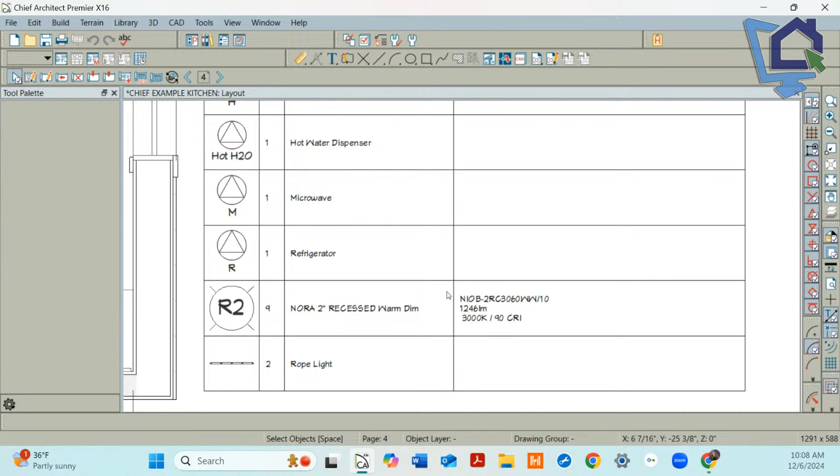So what I have on my screen are just some things I really believe you need to do regularly, and that's making sure you're saving things to your library properly. I'm really meticulous about my lighting, very, very picky about my lighting and what products I'm using. So I've actually saved recessed can information into my library, and in those objects I saved all of the information, so I know exactly what model number to use when it comes in.

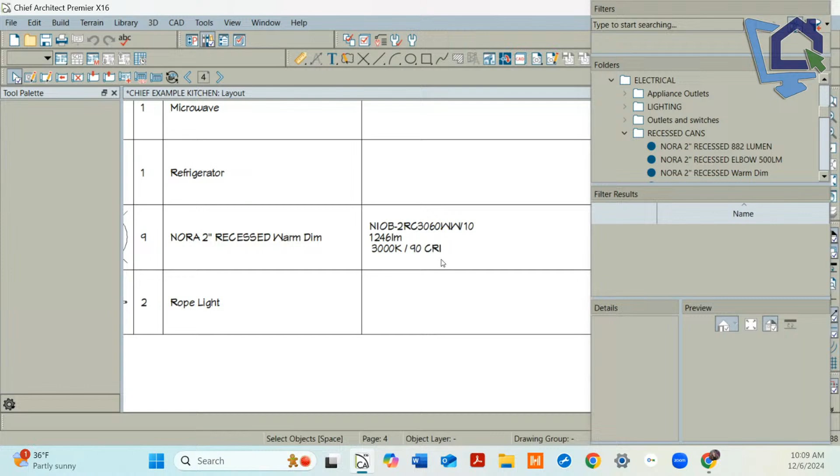For that fixture? Where are you saving that? I saved it in here, right in my library. So when I open up my library, I added this object, I created this object, I saved it, and I put all the information in the object information panel right here.

And I do have custom fields that I added. I want to know what kind of trim I need, what kind of lighting, so I created my custom field right here called trim. This is the coolest thing - I create these custom fields, and in here I'll have fields like amperage, which we need to put on our electrical plan for our appliances. The electrician needs that information, so I can immediately add it right into my field. All I have to do is just type it in.

I'm gonna put a pause to you real quick. Sure.

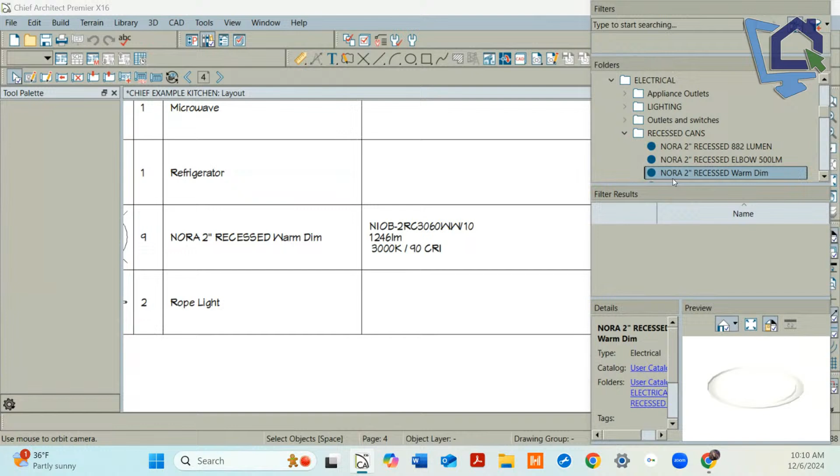Now you have amperage, but you didn't format it as a number, which is a new thing in X16. Let me open this up. See, this is where we should all be doing this as soon as Renee says this. So under amperage, by the way, you could do it in lowercase and then format it so that it's uppercase, so that you have the option to do either or.

The reason why I put it in caps is because that way I can find it in the catalog. That's why I put it in the schedule, and I can explain that. But in the field name, you could actually have had that format as a number. And so now when that reports to a schedule, that can be tallied as a row total, so that you could tally up all the amperage for all of your various fixtures if you wanted to.

I don't know that we need that. I could actually put the lumen output -- well, it's not even lumen output, it's the wattage in here. I could actually have a wattage thing, but nobody's asking me for that kind of information.

So go ahead and put a field value in there real quick for that fixture. I'm going to totally derail you. Okay, we're going off the rails, this is not planned. You're just going to put 20. That's it, just put 20 in there. Well, if you put 20 amp, the field value will actually come up with an exclamation mark saying that hey, this is not a number.

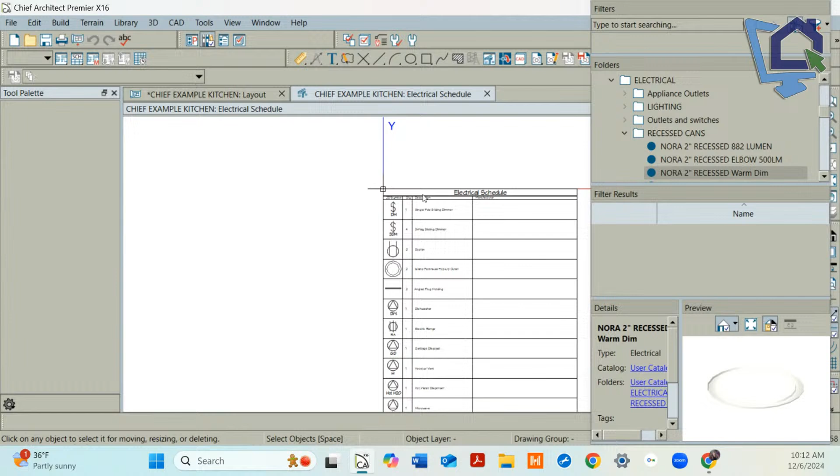Got it, okay, and then there you go. Go ahead and press OK. Now I don't have that in the schedule, so I can open the schedule and add it. Place that fixture in the plan. Oh got it, right there.

Hold on, if I can grab it and move my schedule. I'm not in plan view though. There you go, it was this one, just put it in the plan. Okay, it's there. Now here's the next thing I would have you do.

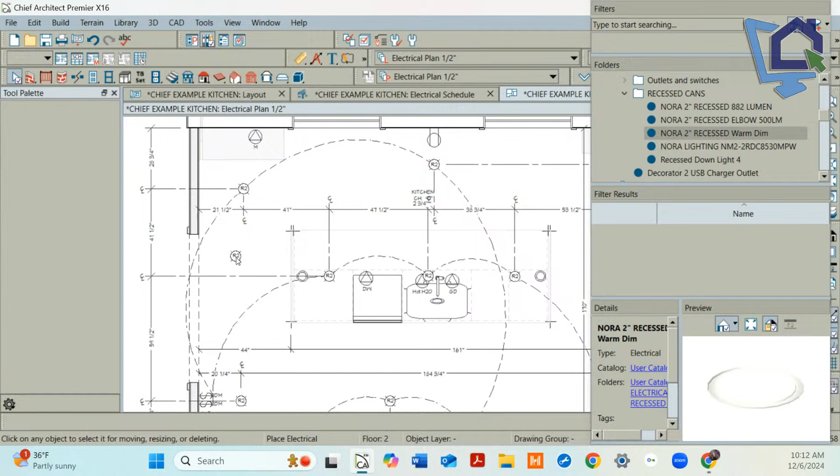This is a good one. Go ahead and get into preferences. Are you all following the bouncing ball? Totally, yeah, this is the thing -- following the bouncing ball. Get into the unit conversions panel.

Unit conversions, and you're going to add a new unit and call it amp. And this one I would definitely do sentence case -- definitely, so AMP, capital A and B... yeah, capital A. Okay, now it doesn't matter what measurement type it is in this case, because you're just using it as a reporting value. So go ahead and just press OK. So we've now created a new unit that is an amp, and press OK again and get out of preferences.

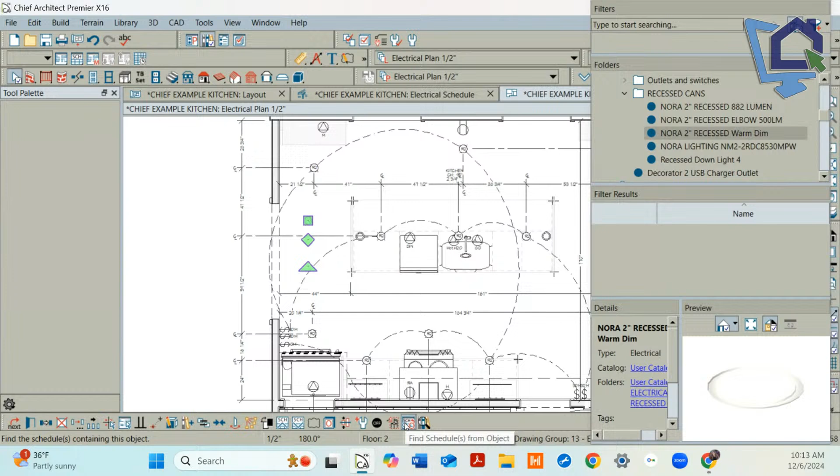Now go check your schedule out. You could click on -- here's a new trick in X16, by the way. Would you go back to plan for a second? Click on that fixture that you just placed. In your edit toolbar, the second to the last icon there, find schedule from object. That is so cool, I love that.

Now open your schedule and add that custom field. This is why I have it big, so you can actually find it in caps. Explain how you just did that part. We're in columns and rows. Oh, so I went to columns and rows. Anything that I add, I put in all caps.

Everything that's upper and lowercase is what the program has, and it's going to pull information from the materials schedule, so I can't find it. So I capitalize everything that I need, and then all I did was add it. And then I just hit OK, right? And now you hit OK, but let's actually go back into it.

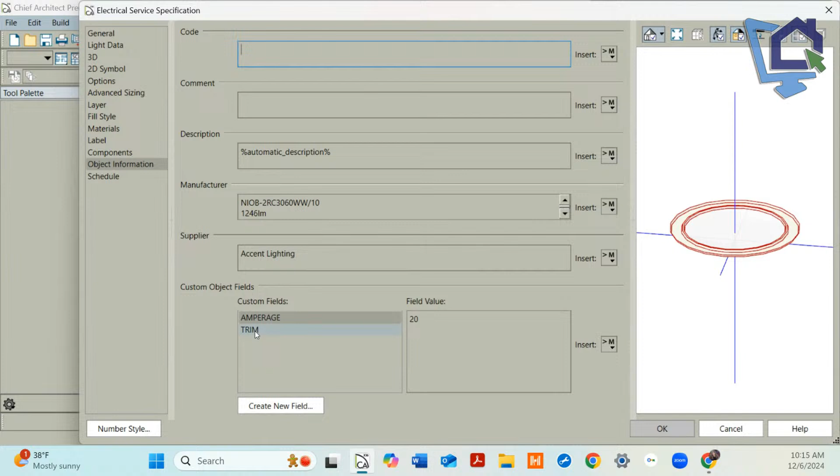Okay, go back into the catalog again. I don't think I had -- and then select amp, and now see, this was the wrong one. This is the one that was not formatted as a number because it's not giving you a calculated total on the right hand side there. So you added one that was amp that wasn't a number format. Oh, because I didn't do it right when I added that information in here, because I had this amperage and it's not, and there's no way to go back on that.

Number. You can press cancel. I think you can, it's tough to get it from the catalog though. You have to get it up here -- default settings, schedules. Got it. Custom -- custom object fields. Yeah, and then amps.

Yeah, go ahead and double click that or edit it, then format it as a number. There we go, got it.

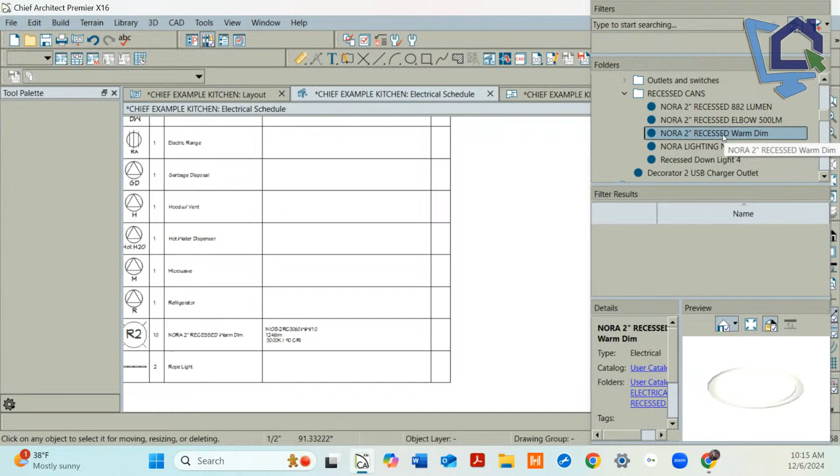But I don't know that I actually put that one in here because it's not showing up. That's okay, I don't think I put it. Just open it up real quick. Okay, click on AMP again. There we go.

So now we have that option over on the right-hand side to calculate total or sum similar rows. Here's the next cool part of this: on the left-hand side, we have a number formatting panel.

So in your panels, yep, and then go ahead and click on AMP and you get to specify the unit. What unit are we going to specify it as? You can actually pull anything down out of here, but you would pull amps.

AMP, which we just created. And then you're going to change decimal places, switch to decimal places and just set it to 0 probably. Got it, so there you go.

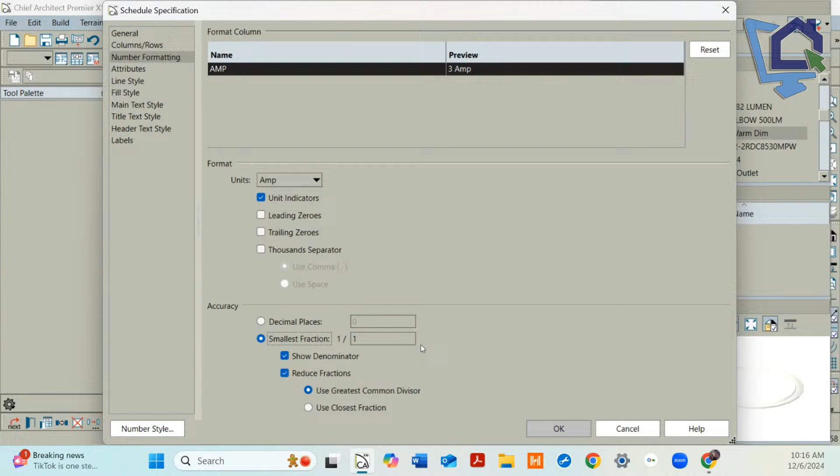Now you have something that's reporting amps and it will tally a total. That's pretty cool, that's pretty cool.

If you have to do that, am I derailing you? No, it works, no, you know what? I love that, actually just the fact of going back here to do the edit just totally makes sense, because sometimes I end up making more special things than I want, and then I forget to go back here to get rid of them, right?

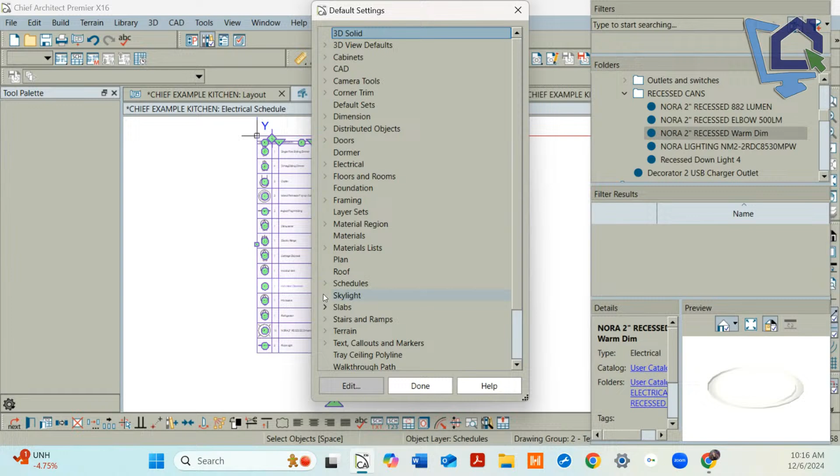So you can come back in here into your schedules and get rid of them, and that's really nice. Hit done real quick and go into your schedule again. Okay, one of the greatest things about schedules, go ahead and get into columns, rows.

Let's click on any item in the columns to include, so on the right-hand side, anything on the right-hand side, one of the ones you already have. Okay, yeah, we have our ability to rename whatever this is.

Yes, so when I do custom fields, I have it that it's just number input 1 would be my amperage. And then in the schedule, I rename number input 1 so that I'm not building out a ton of custom fields across all my objects. So that way, number input 1 could be amperage for an electrical legend, but input 1 could be...

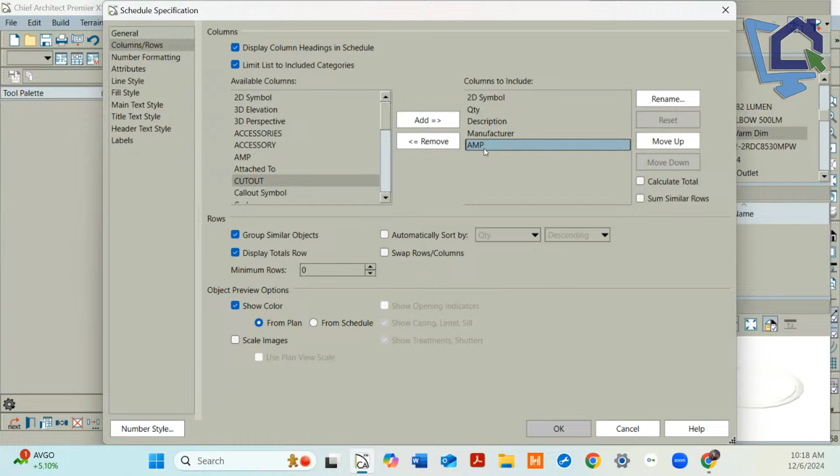...net free area in a foundation vent schedule. It means I don't need to add all those custom fields. I'm just using one custom field and then renaming it in the schedule, if that makes sense. And I can go over that later. Oh, that's pretty cool, that's pretty cool.

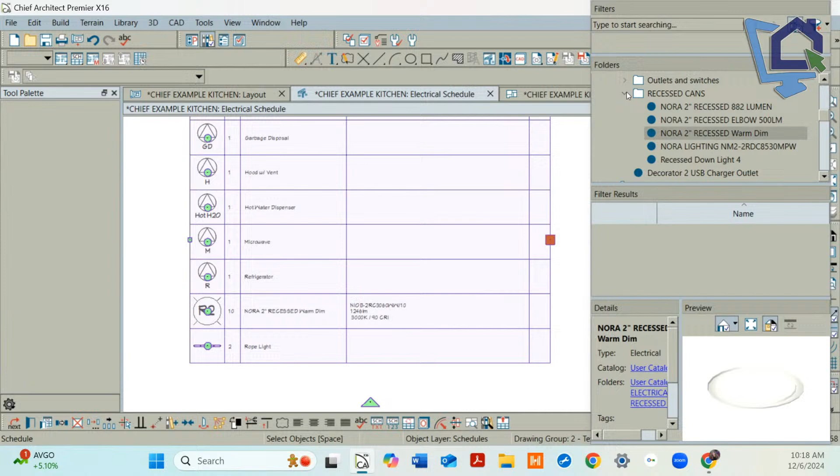So exactly, there's so much opportunity in the program, which I just think is fabulous, right? That's the thing, the goal I want to share with people is that you can make your life easier. So in lighting, if I have something special that I use all the time, or an electrical thing I use all the time, I have this already set up and saved in my library.

So in my library - and I have Renee's library in here too, so it can be crazy - but in my user catalog, I actually have my schedules saved, and they're already set up.

Okay, yes we can, Alan, yes we can, good question. Oh see, that's great, okay, go to sleep. Sorry you guys, I really apologize. My grandson comes here one day a week, and it's during this, so I absolutely apologize, you guys.

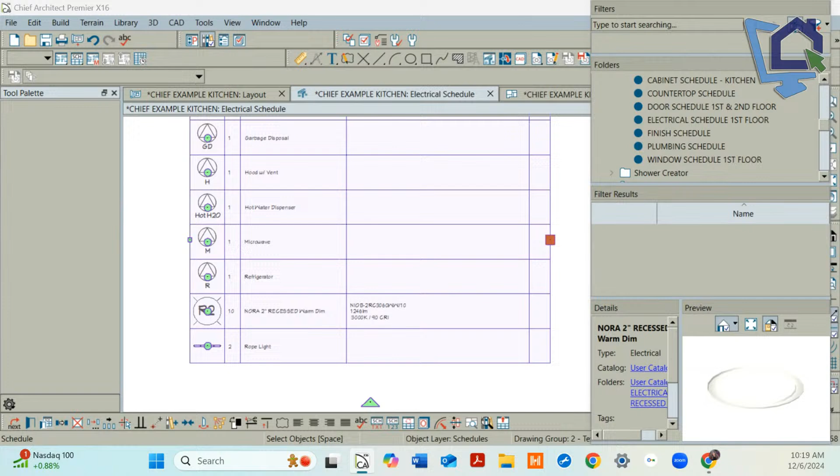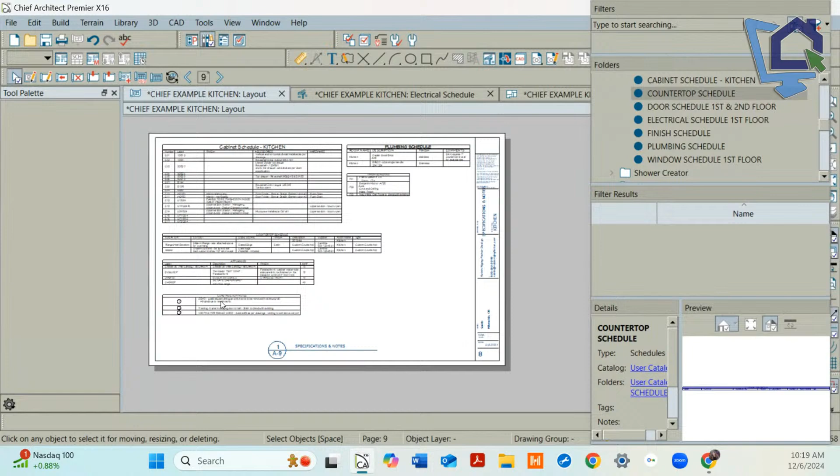Anyway, so here's the new ones that I really enjoy creating schedules, and this was one that I learned a while ago and just thought this is fabulous - creating a custom countertop schedule. So designers are constantly doing crazy things with the kitchen. So I was playing around with this design, I just kind of messed with it, and I created a custom countertop schedule, which I started using a lot more now.

And what I have in here - now this is what I found you have to do - is in this plan, I have my range wall elevation has one countertop, one kind of material on it.

And my island has another countertop on it. What you have to do is save the countertop as a custom countertop. Once you save it as a custom countertop, then you can start adding all the information that you need for your contractor or installer. They're going to ask you what kind of finish, what kind of edge detail, how you want the details done, and you can put all that information in here to create your own custom countertop schedule.

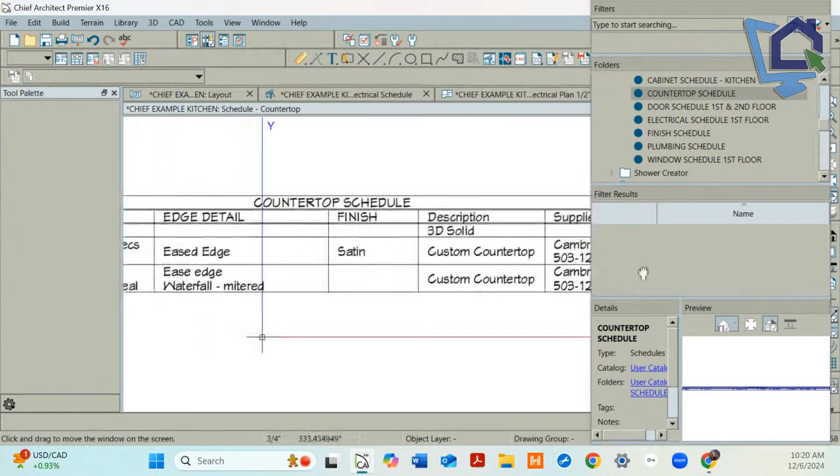How do you make a custom countertop? Yeah, this is easy, this is really fun. I am so in love with this program, it has changed my life. I was an AutoCAD person for years, and AutoCAD is a great program, but oh my gosh, my specs were crazy. So this countertop is a custom countertop.

What I did was select it - right now it's a custom countertop, one countertop. To show you how, I'm going to go over here because this was easier. I'm going to delete the custom countertop off of this plan. So I'm just going to delete this and get rid of it. It did not remove - oh, on this side it did. Nope, that's the custom countertop. I actually selected the wrong thing.

Hang on a second, guys. Get rid of the countertop. Well, I deleted the cabinets. So I'm deleting the custom countertop right now. So these are now standard cabinets with their own countertop attached.

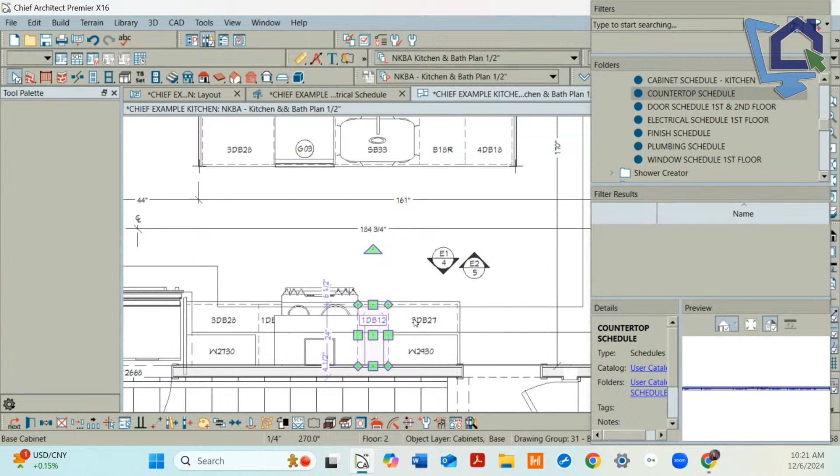To create a custom countertop, you just select - hold your shift key down and select all of the countertop, all the cabinets. Then at the bottom of your screen you have an icon, I don't have my zoom thing on here so I can't show it to you guys, but at the bottom of your screen is an icon that has a red top on it, and that is the custom countertop tool.

Once you select it, you actually create - I think you already did it. I already did it, yeah, let me undo that so it's back again. Let me make sure we have it back. Okay, one more time, there we go. So once you select all your countertops and cabinets, then you push the red button. I am just messing up, you guys. No, go forward twice. Go forward, I don't know where I am now if I did too many. Oh there - no, you gotta go one more time forward, one more time forward, there we go.

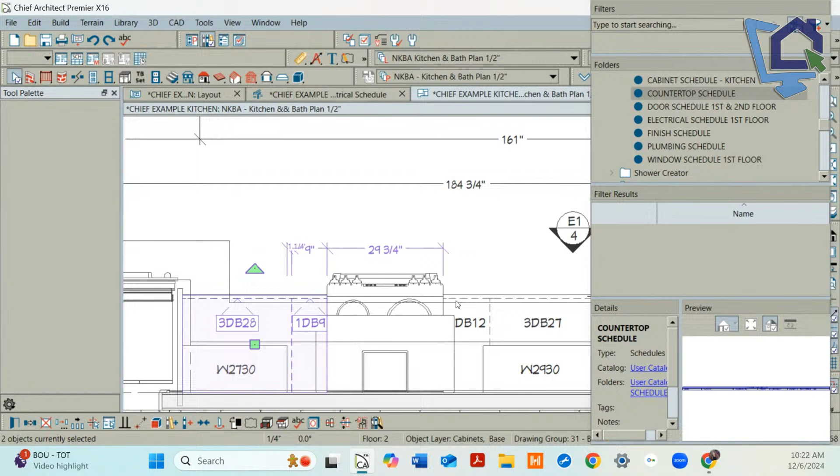Yeah, it's still showing a countertop there, I still don't have it. Let me see, just open a new plan, you goofball. I'm so silly. What she's trying to say, as she gets herself back together again, is that a custom countertop replaces the automatic countertop that exists on the base cabinets.

Once you do that, you can manipulate it in any way that you want, including being able to set specific values for that particular countertop, which you can't do without changing the default on the cabinets themselves, or you've got to do it at a cabinet level. This gives you a very easy way of doing it.

So we're here right now - this little button on the bottom says generate custom countertop. You select it, and once you have a custom countertop, you select it and now you have a field that allows you to have your object information. So now you can start filling out information in here and say all the things you want with it. Now that I've deleted it a million times, I think I've lost most of my information.

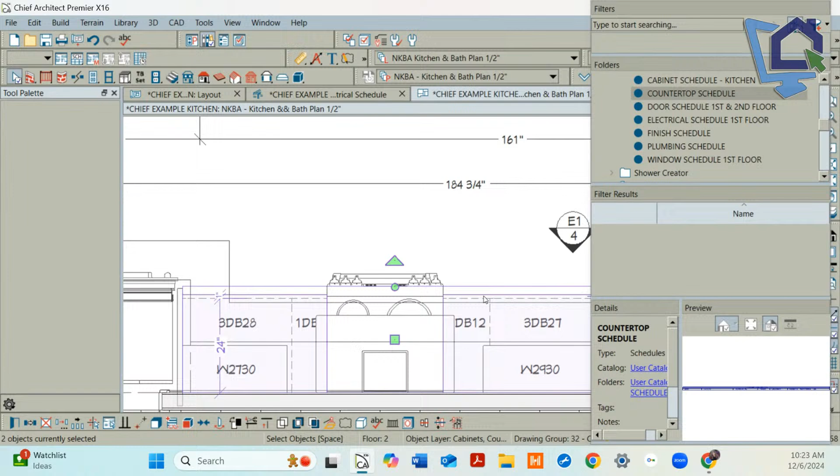So whatever, now you can go into it and open up the countertop and you have your object information where you can actually say where it is. So I have my location - I can type that this is my range wall, and I can add that my cutout is for a slide-in range. And I can write something like specs for overhang.

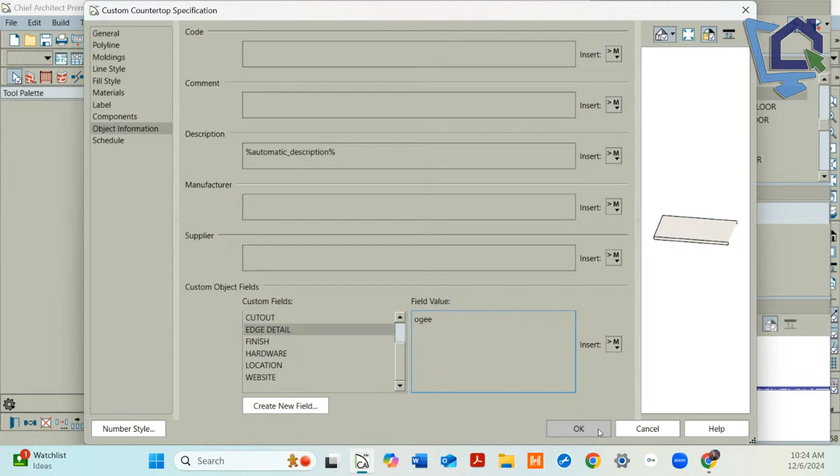I can add information here. I can say that the edge detail is going to be an ogee edge, right? I can add all this information and then it's going to immediately report to my schedule. Well, if I pull a schedule here. You include those rows like you did earlier? Yeah, and I do have that, as long as you have them added into your schedule.

So let me just pull the schedule up, and I probably have too many schedules open now. But if I go to my countertop schedule, let me just pull it up here. And you can see that you can just immediately start adding that information in there. So I have all of that information. What I don't have in here, I have not added location. So I'm going to remove that.

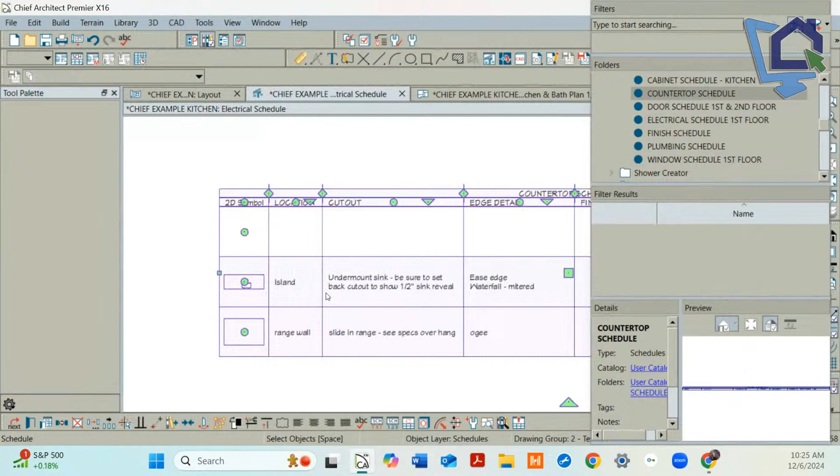Have you ever added the 2D symbol? You can do that. You can easily add the 2D symbol. It's going to look like a rectangle, unless it's a corner or a shaped island or something like that. So you can add that information. It shows the sink cutout. Yeah.

That's nice. Yeah. So in this one, it's not going to be great because it's actually two separate sections. So I don't find the need for that, because if I'm doing a very odd countertop detail where I want to be able to show more information, then I'll do a countertop plan. So in this plan, I didn't do that, right?

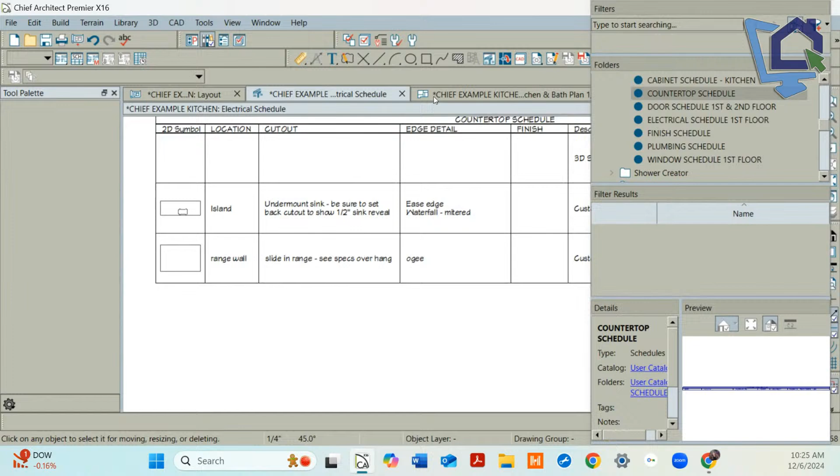But could you open the schedule up one more time? What's that? Open the schedule up one more time. Yeah. Go ahead. Could you open up the actual schedule real quick? Open up a brand new schedule? No, open that schedule. Open it. Oh, sure.

See how under object preview options, scale images is unchecked at the very bottom there in the last section? Right here. Yeah. So you can use plan view scale. Go ahead and check that. And this will actually scale those countertops according to the size of them. And then you could shrink this preview down by changing your row width. Just change this. Yeah.

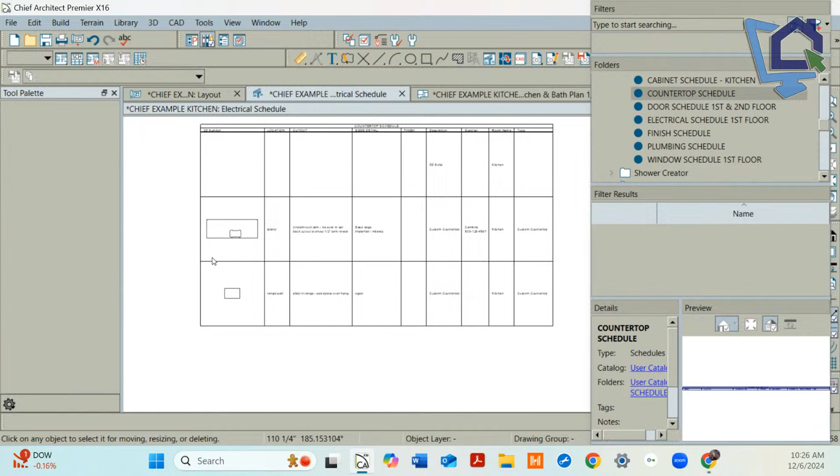Well, that should have done it. Not doing it. Oh, interesting. Yeah, if you open it up again and uncheck plan view scale, that might be it. Yeah, just take that off. Yep. And now you should be able to shrink that row. Now you can shrink it down. But here it is. I probably would not do that, Renee.

Well, I don't even have it here because I wasn't playing with this plan to be able to make it do that. Hold on a second, let me turn my library off. I would actually do a countertop plan like this, and then I would put dimensions on it.

So in this plan, I actually create custom countertop schedules, or a custom countertop plan if I'm doing something that's really crazy. This one is not set up. I didn't do anything with it because I didn't create this plan for this project, but I could add any extra information that I needed just by creating a custom countertop plan view, right?

And I do that a lot, especially when I had a project where there were a lot of notes that the countertop people had to have. So I actually created a custom countertop plan, which was really fabulous. And that's one of the things that I really enjoy, making the changes with this program.

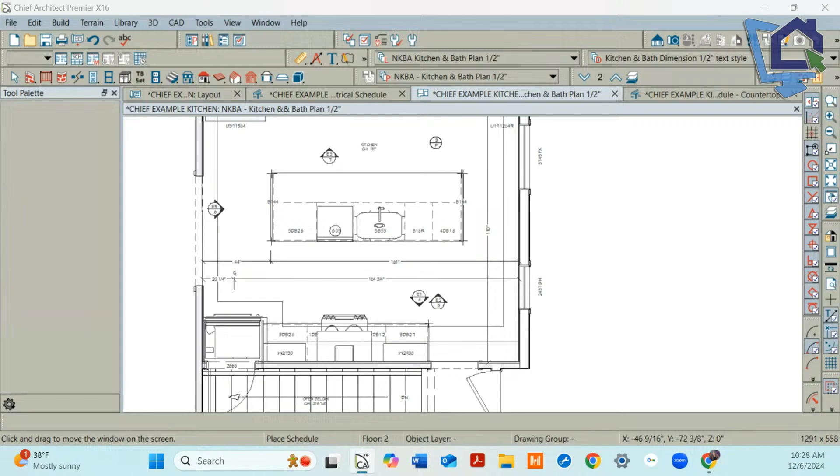So the other schedule that I just recently did, I was working with a designer who, this is crazy, I've never done this, but she was buying art for a client, the client was moving, and they were hiring a hanger, somebody to come in and hang all the art. So she wanted to be able to create a plan for the installer to know what piece of art went in which room and where it went.

So what she did was she did a material region on every wall. She opened it up and she added the location. She added the size of the art and the name of the art and had it by room. And then the installer knew which wall to put it on because she would say it's on the west wall, the east wall, the north wall.

And we created an entire art schedule, which I never even, I mean, she was like, how do I do this? It's like, okay, let's figure it out. That was a good one. It was great, right? Something that I would never do. Another designer said, well, what about furniture? Which is crazy, but you could then say, oh, the green sofa that's 6 feet long, right?

You open the object up, you call it a green sofa, 6 feet long, give it its name, tell it what room it needs to go into. And you could give that to your installer, your movers, and you don't have to stand there at the door going, here, this room, this room, this room, you know.

Why is she doing a material region as opposed to the actual art as a fixture? So the way we were doing it is you just do a material region, then you apply the art to it. Oh, that's how they're doing it. Gotcha. Yeah. So they had the material region, they applied the art to it, and then they called it that. Okay. And it worked out well, but it was just the idea that you can actually create this custom schedule for something that's not something that's standard in the program.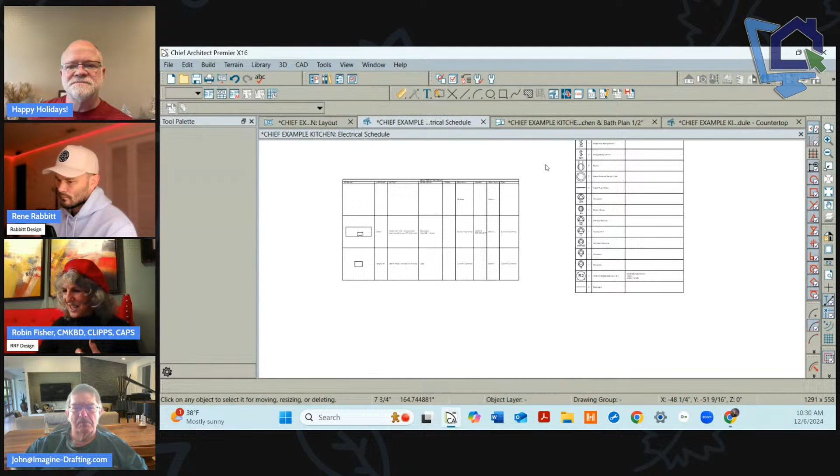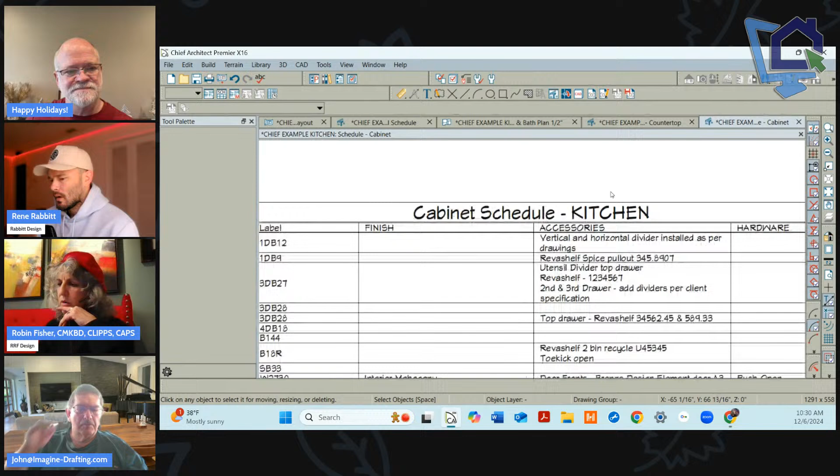Use that find schedule button. Yeah, this one right here. There you go. So if we have the schedules, you can actually add all your information that the installer needs. Now this is something... Oh, how do you add all your schedules on one page? You just send them to the same layout. So well, I would back up and say we typically keep all our schedules in a CAD detail. I keep each individual schedule in an individual separate CAD detail.

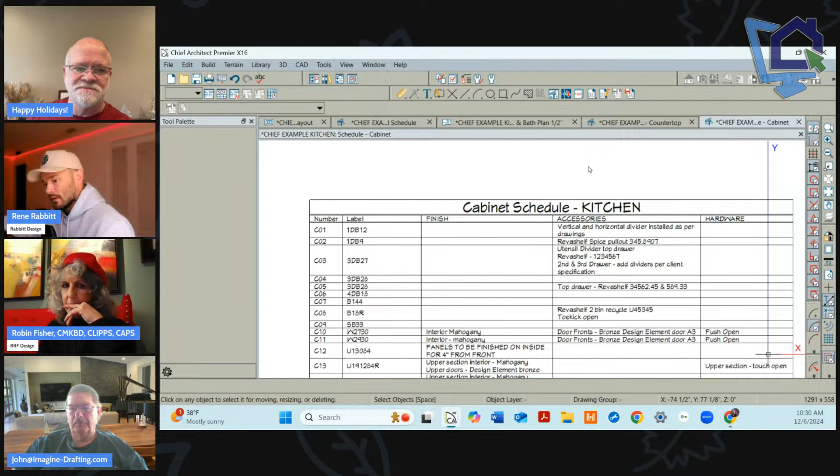Can you tell us why you do that? Oh, because you'll never find them. You will literally never find them. If you had 15 different schedules in this page, you'll never find them. You can always find your... Open your project browser real quick. Yeah. It's just a nightmare not being able to find where your schedule is, which project you're working on. It's this one here. Close CAD details. Okay. Open schedules. There's all your schedules. And you can just select that. Yeah, you can always find all your schedules. You can do it that way.

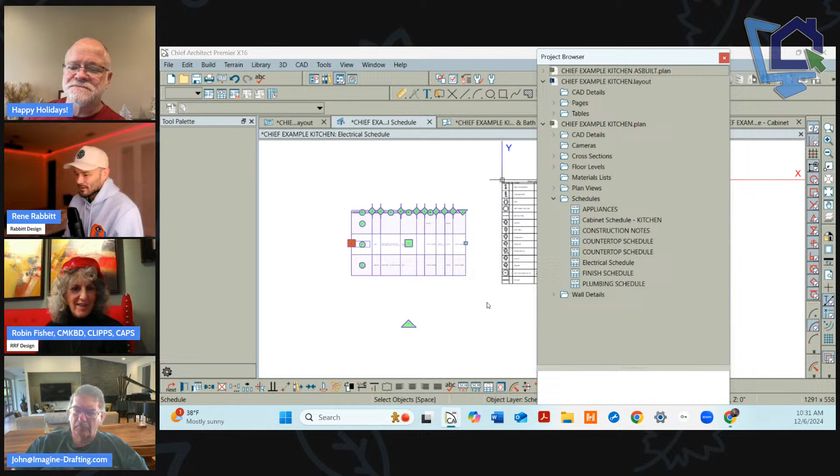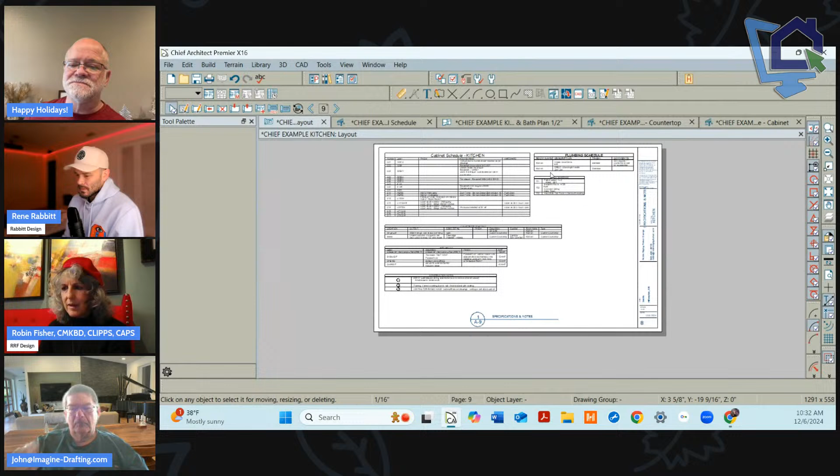So Rene, why do you then put each schedule on its own CAD detail? Okay, so Robin, do you have your schedules placed in the exact same place in all your CAD details? Yes-ish. No-ish. I'm going to say no. Okay. Go to a layout. I don't have my 0 set like you do. All right. Go to a layout. And go ahead and shut your project browser down. Yeah, let me close that out. Okay. That bottom schedule down at the very bottom. What is that one? Okay.

Here would be the reason for me, Larry, is that I keep these in individual CAD details. We're in layout right now. We're not in plan, and I want to work efficiently. I need another schedule on this sheet. Let's say that the appliance schedule wasn't on this sheet yet, and I want the appliance schedule on the sheet. Yes, I could go back to plan and try to find my appliance schedule and then send it to layout. But something that to me is a lot more cohesive and works in the flow of what I'm doing, because I'm in layout compiling my sheets, is go ahead and hit the copy paste button, Robin. Okay. And then drag the center handle over.

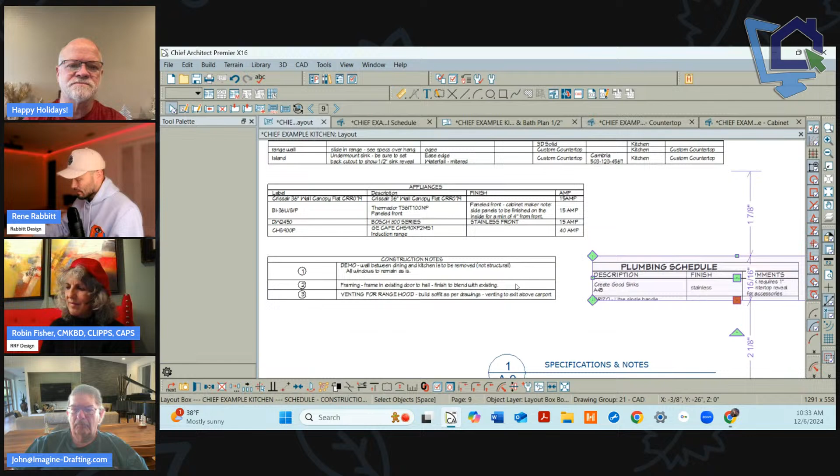This is how I would do this. Yep. And now hit relink and show where that is in your toolbar. Kind of do it slowly, maybe. Oh, it's down here. So that's the relink button. So we're relinking. What this does is we get to point to something else, right? So you could actually put plumbing here, finishes, etc. Now, it does look like Robin has her schedules placed in the exact same place, more or less. So if you do have them placed in the exact same place and they're all the same width, now it's just a matter of relinking and suddenly your schedule's in the perfect spot. You don't need to move it around.

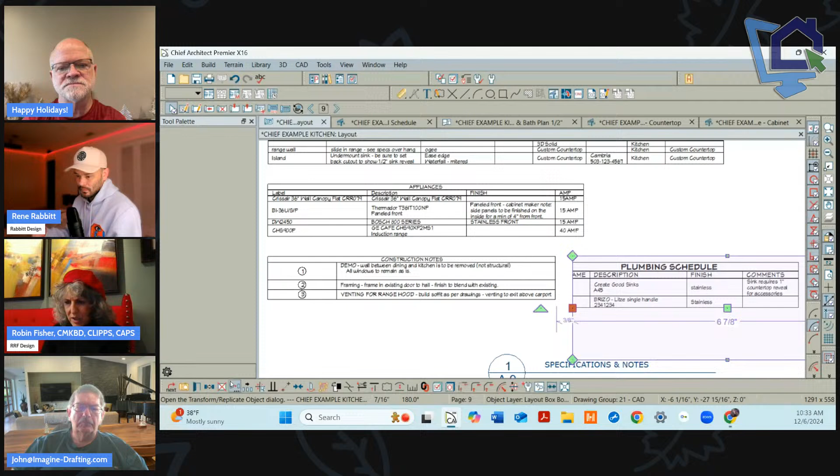But Chief also has some tools where you could hit the center button on this layout box now and center that schedule without editing the layout box. Which is this one? No, it's the second to last one. Oh, this one. Oh, yeah. Look at that. There you go. So that centers that in the view. Another thing that we could have done, go ahead and delete that one that you're highlighting right now. Let's do that same process again. So copy paste, slide it over.

And by the way, actually go ahead and delete this too. I'm going to show you one more trick here. Copy paste, but this time I want you to hold your S key, S as in Sam. And I want you to hold your right mouse button. You've rebound S to something else. I did it too many times.

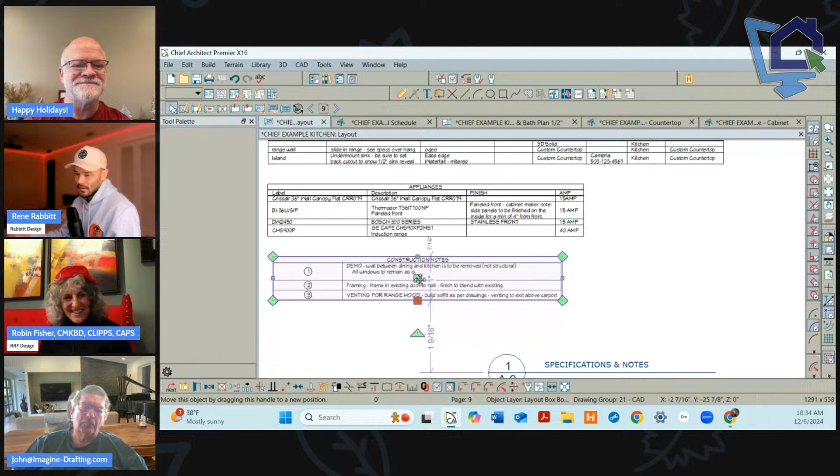Okay, so copy paste. By the way, I would encourage anybody out there to not reassociate your S key with anything like Robin did. The S key for Sam is an actual internal hotkey for Chief Architect. What it does is it makes it so that you will not pick up any snaps when you're making a move of an object. So in case we're trying to slide this over orthogonally and not somehow get hit with some snap where it moves that box over, holding the S key will override that. So that's a really nice thing.

And that's different from holding control. It's a very different function. But if we copy paste and right click, now we're no longer getting hit with all the angle snaps, but you're still picking up snaps. Yeah. So you're right. Okay, so then you can move it wherever you want to. Can you explain a little bit more why S is different than control?

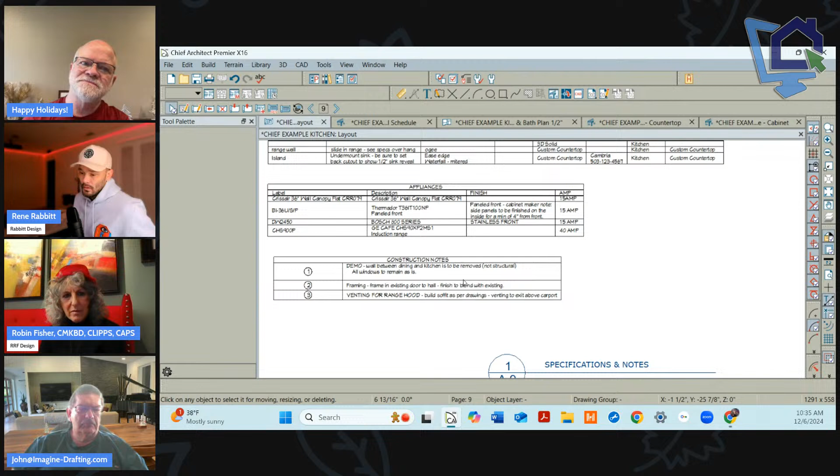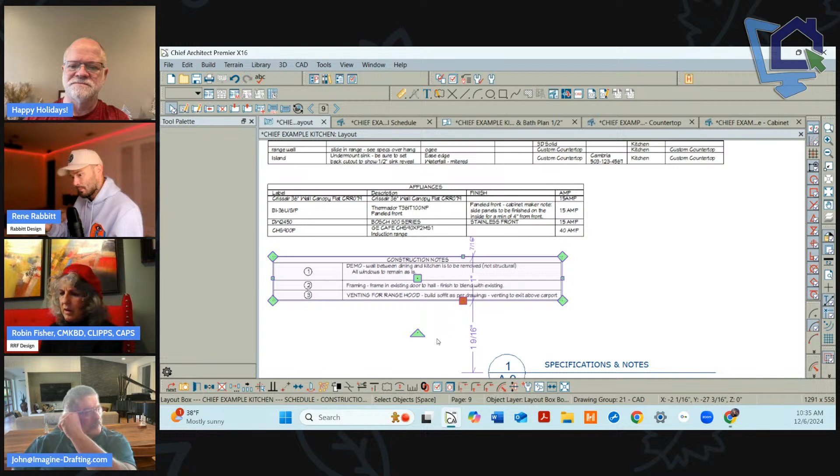Control overrides all snaps, so we're no longer even bound in an orthogonal plane. So that's kind of the trick there. S just means we're not picking up any snap points, but we're still bound to angle snaps and orthogonal directional movement. Okay. So it's different from control. Another thing you could do is copy paste, right click and hold shift, and that will help us bind in orthogonal lateral movements. Anyways, copy paste and move this over.

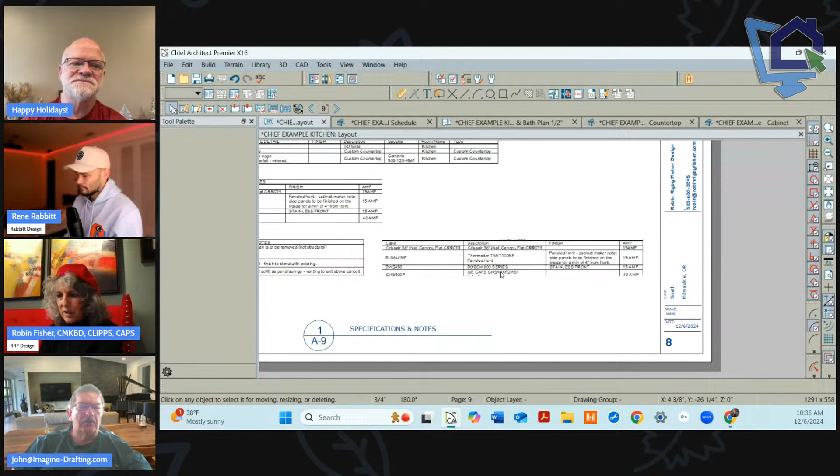Okay. And then let's hit the relink again and pick a different one, but don't press OK yet. This time, see where it says keep layout box contents position when relinking? So if we don't have our item in the same XY space in our CAD detail from one CAD detail to the next, if you uncheck this, Chief will try to automatically center the contents of your box when you relink it. Kind of, yeah. It's just not big enough. Okay. Oh, that's pretty cool. Not tall enough and everything, but it's good. It's a good thing to be able to be aware of.

Yeah, that's cool. So did that answer where we save our schedules and how do we get them all in? Well, did you address why you keep them in individual CAD details as opposed to grouped together? A reason for me is one, we can get a layout box label that is specific to the CAD detail.

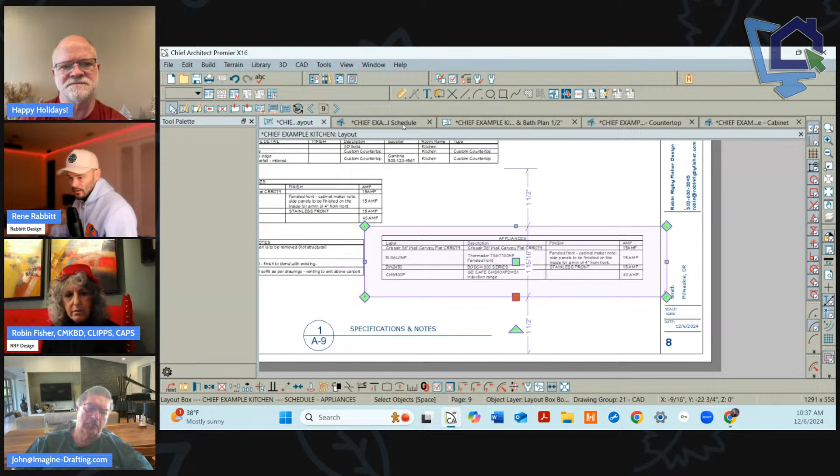So if we went into this schedule and decided to not show the title of the schedule at the top bar there, which says appliances in this case, we have the option to not show that label. And so instead we could have the layout box's label, and the layout box is what's selected right now. That's what Dan Bowman calls the viewport to our CAD detail. If we wanted to, we could turn on labels for this layout box, and it will pick up the label for what we name this in our CAD details.

So what you're saying is by keeping them in their own independent CAD detail, it's providing you a further level of granularity to control what you want to do with the results. Is that fair? Yeah. And another reason is if you've ever considered doing what we call a warehouse plan, which would be a separate plan file that has a bunch of details that we use over and over again for a project, and it's not necessarily pulling information from its plan file that we need. So let's say that we have a set of CAD details that we want to use that doesn't need to be in our active plan.

And let's say one of those warehouse details is for slab on grade. Another one of those warehouse detail plans is for stem wall construction.

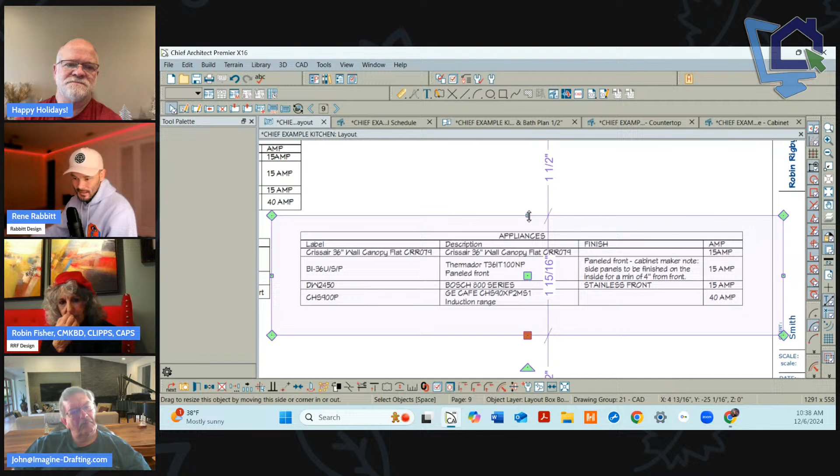That means as long as the CAD detail name is the same, we can just swap those out just by changing the reference plan being used in layout. That's a little bit advanced. You'd have to go over that, but there's quite a few reasons to do this. How about this? Just keep your schedules in separate CAD details. It just makes it easier. Just do it.

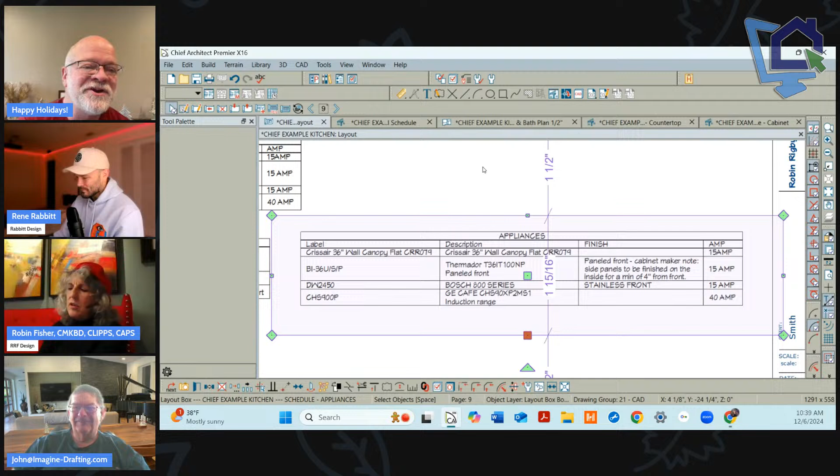So Rene, let's go back to something. Right under Rene's name, it says, "Trust me." Absolutely. No, seriously, that's what you need to do is just trust this one and actually just do that. Just keep your schedules in different CAD details. It will honestly save your life for being able to find what you need when you need it. But great question from Douglas Moore.

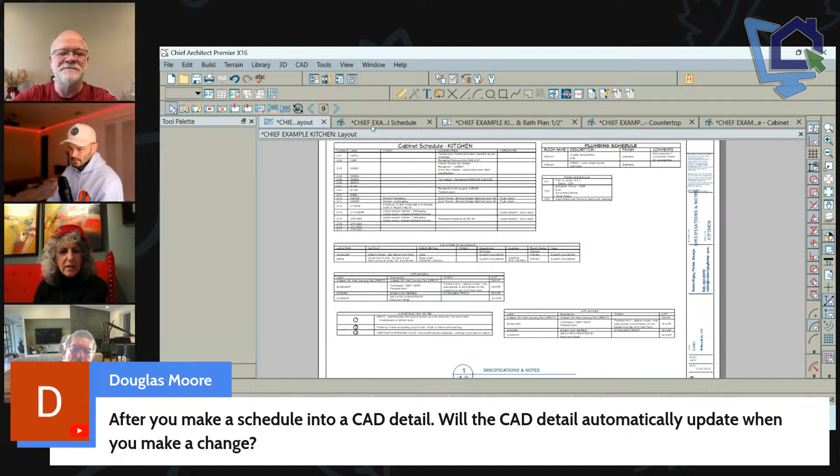Yes, absolutely. It will automatically update. So Rene, here's the point that I do want to get to. One of the things that you have said, and I absolutely agree with it, was finding 0, 0. So the point of finding 0, 0 on your plan, when you start drawing, if you open up a new plan, you should have a point here, which it does. I don't think that's 0, 0 though.

It's not. This is something that makes it easier for when you're sending drawings to your layout so they're all on the same plane so things don't jump around. So like your schedules, they all show up in the same line. How do you find 0, 0? And when you start drawing, do you start drawing from that corner? Is that always the corner of a house?

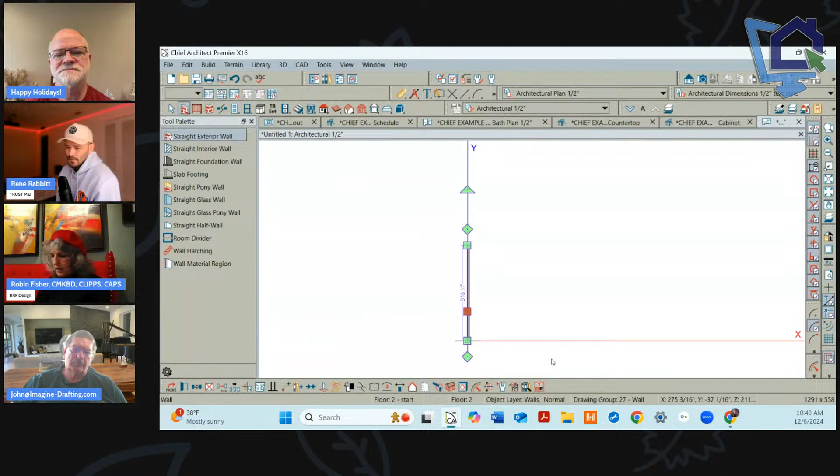Chief has 0, 0 at the bottom left of your drawing sheet, which to me makes no sense because you could change the drawing sheet size and now you're screwed. I agree. So I have my drawing sheet at the center of 0, 0. And you can easily find it by getting into your CAD menu. And under points, which is the first one.

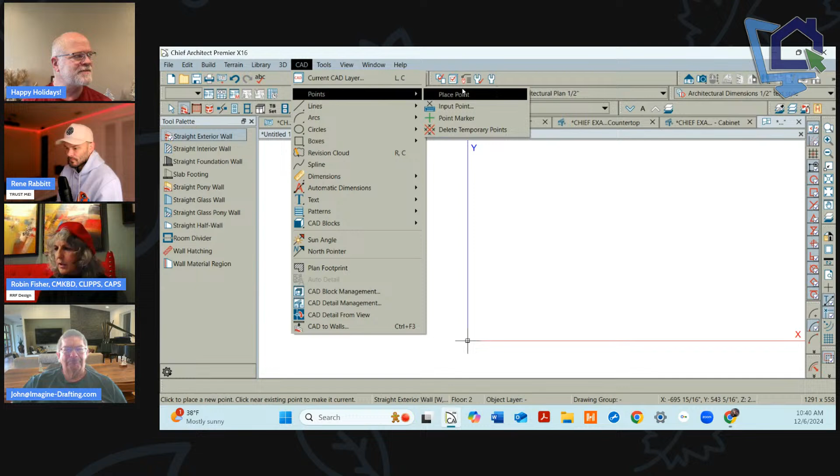And then input point. And make it absolute location, 0, 0. And then just hit next. Or I don't even think you need to hit next. You just press OK. And that's 0, 0. Oh, I'm there. So then, again, when you start drawing, is this always the bottom left-hand corner of your house? Or the top right-hand corner? To me, that's 0, 0 from out of the default template.

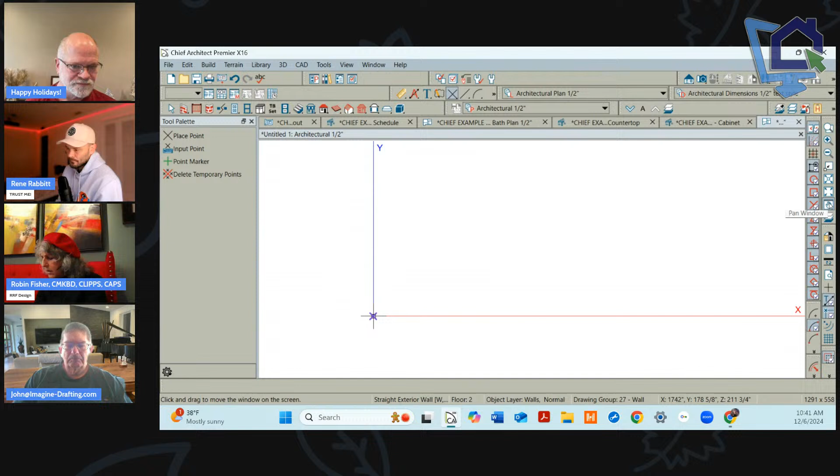0, 0 is the bottom left-hand corner of the drawing sheet if you had the drawing sheet turned on. Oh, so turn the drawing sheet on. Middle of your right sidebar there. It's the one that looks like a white page with a white page outline. Further down. Right there. Got it. So then that's where the drawing sheet is. You changed your drawing sheet, so now 0, 0, what is it even doing?

Not a whole lot. And 0, 0 is nice for referencing dimensions, measurements, everything. It's nice to have a center point that everything else can go around. Your cameras, everything else can center around 0, 0, if it's in the center of a drawing as opposed to the bottom left corner. Like what I do if I'm looking at cameras, I will create a circle based on 0, 0.

And I can expand or contract that circle, and I can place my cameras all around the perimeter of that circle. And I know I'm going to capture everything in that drawing as opposed to having to figure out where they go based on the bottom left corner. Whether I'm working on a 2-bedroom rambler or a palace, it's always at the center of the drawing.

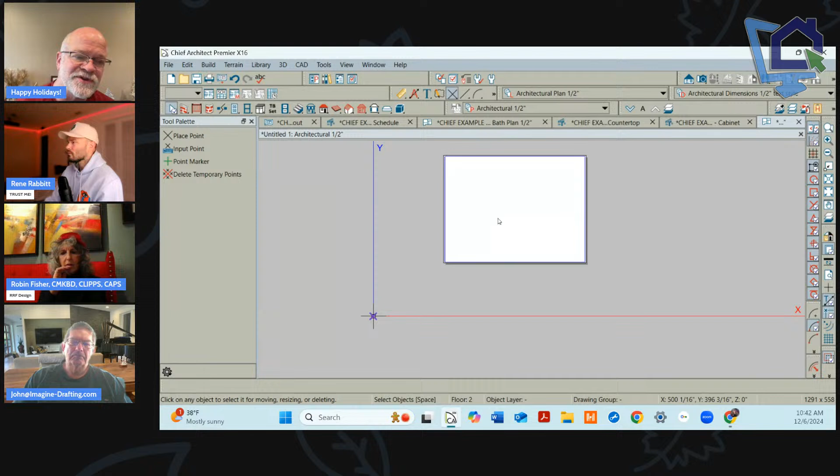So, because there's enough questions, how do you move the drawing sheet to 0, 0? You can snap off of a point. So you could select the drawing sheet and do center and center it about that point if you wanted to. Just center, and that's where you do it? You're not going to be able to do a point-to-point center because I don't think you can grab.

Oh, were you able to grab the center? Yep, grab the center. Now check this out. Change your saved plan view real quick. Oh yeah, architectural half is your saved plan view. So change my saved plan view. Okay.

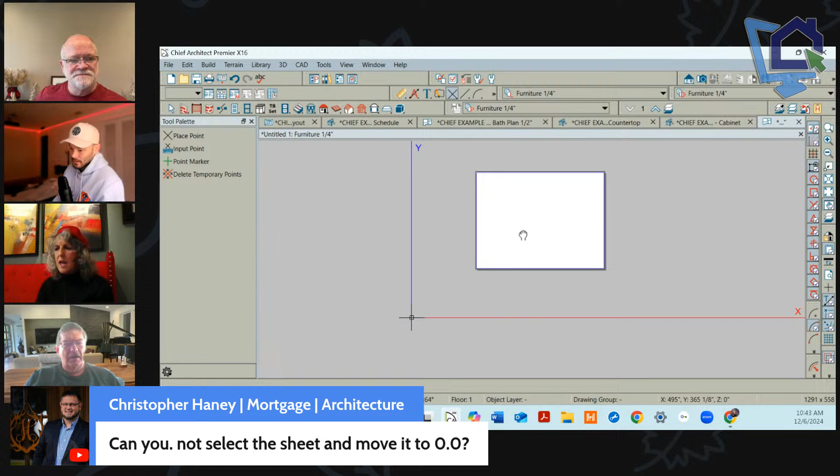That kept the drawing sheet in the same place. It's all right there, where the drawing sheet does not move. My quarter inch changed, that all changed. For every saved plan view, you have to move that drawing sheet and save it as a new template. So you just select it, find your center, and move it where you need it to go. I was able to do that.

Okay, so questions guys. Hey John, I have never used a drawing sheet, so am I missing something? Is there a reason to use it? It helps when you have your drawing sheet. How do we set our drawing sheet up for our print size? That's in print preview, you pick the drawing sheet size. It helps, for one, a lot of people that do new construction, it really helps them visualize the size of their home that they're designing, so that they're not blowing out scale, because it's just a nice visual marker.

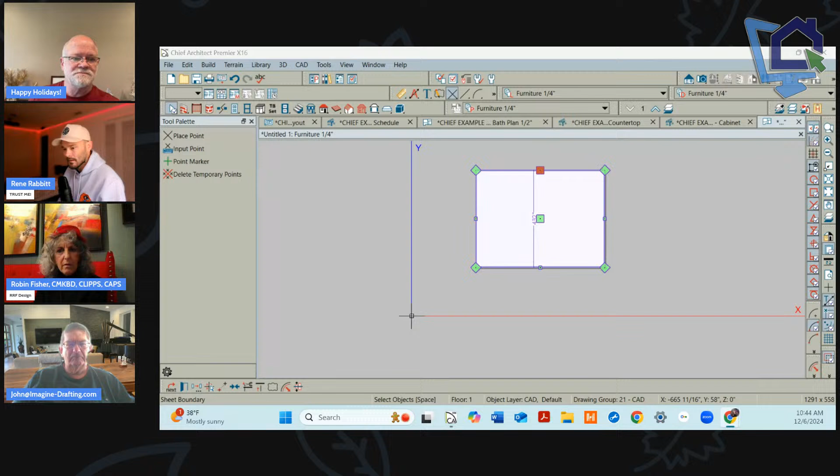To understand, hey, I've drawn a million houses on an ANSI D size sheet. As soon as I start hitting these boundaries, this house is too big. So it's kind of used as a visual cue. And it also helps me organize and understand very early on in a project if I need to size my drawing sheet up from the start, so that I'm designing for the correct sheet size before I start sending stuff to layout, and finding out later, shoot, I've got to change the sheet size, which is a ton of work to then go change all the composition on the sheets. Got it, that would be my main things for that.

So Alan asks, can we change the CAD, can we view CAD details as a gallery? Here, I'll put my screen up for a second. You kind of can, but you have to do the work to do that. You're just going to send all your details, in this case, to a plan or layout, and you could use it as a boilerplate layout. But these are all individual details that are being sent, so it's not a gallery per se, but it's certainly a detail sheet where these are all linked to something, and I could relink them to something else, or slide them over, or do whatever. So that would be an example of that.

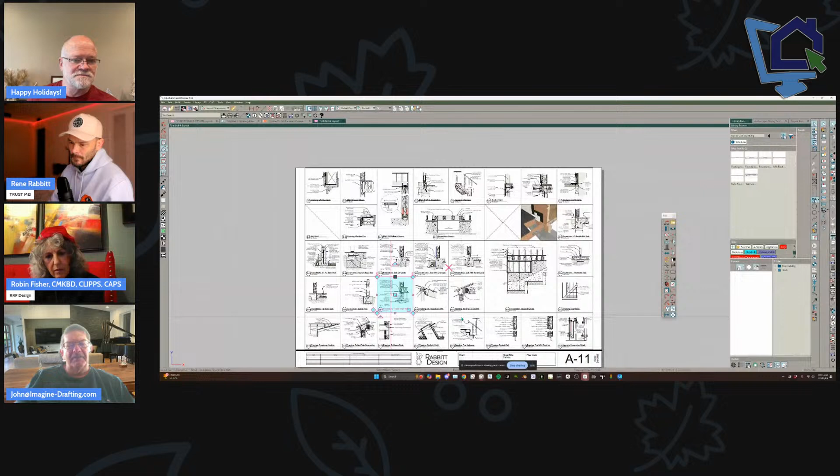I've never checked this out, but you can save your schedules to the library now, right? Yes, yeah you can. Do they update in the library? No, you have to put them on your plan, and as soon as you put them into your CAD detail first, they update. Which is kind of the bummer, right? You definitely have to keep it organized.

Well, I have a few in here, and if you're ever wondering about finding schedules very quickly, you can just type in schedules. If we look at this, Chief now has this as a type, so we can limit our searches by type, which shows schedules. Now it's really easy to find the schedules that I've built here. This is one I've got where it's, this is probably more advanced, but it's building out and telling me what's my concrete footing volume and stem wall volume of concrete, so you can use schedules as calculators.

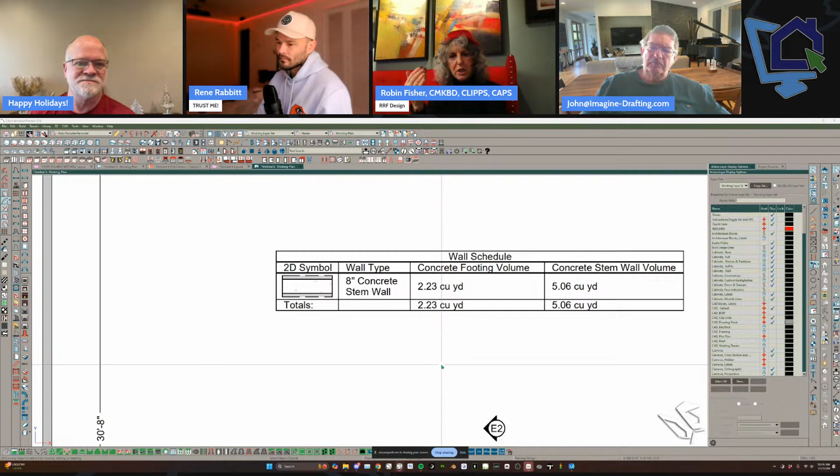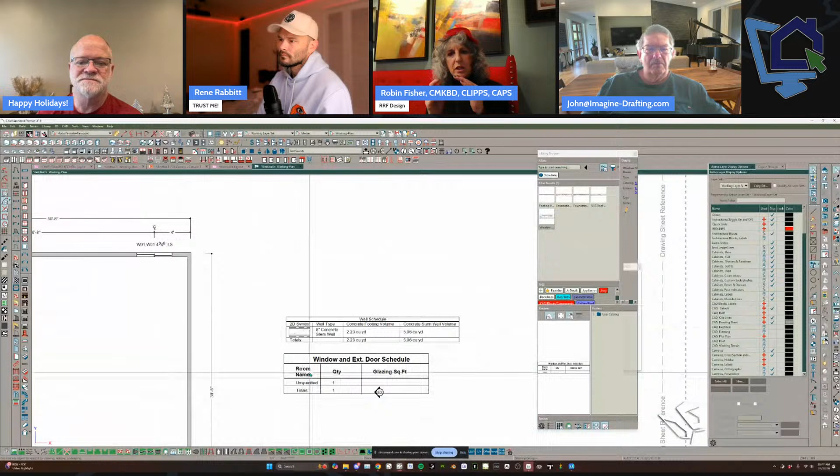This would definitely kill some time to explain how this was done, though. But the whole point of the idea of schedules and saving them into your library is you create the schedule one time, you create all the information you need in there. If you have a custom field, you create that custom field, you save it to your schedule. The schedule's already made, so now as you're working and you add information to an object, that information is automatically being sent to that schedule. So as soon as you send that schedule to a CAD detail, the information is there, and your specs are being written as you are designing. That's the point I really want to make, is that you really need to take the time to create a schedule.

You create a schedule for whatever it is, save it, make it the way you want it to be, put all the information in there, save it to your library, and now it's done. As you're designing, you're adding information and your work is done. That's the beauty of this program, and that's the beauty of understanding schedules and working with them.

So that's, I can't even stress it enough. Writing schedules or writing specs, I don't know very many people who really enjoy doing it. Oh, but I got a trick for you, Robin.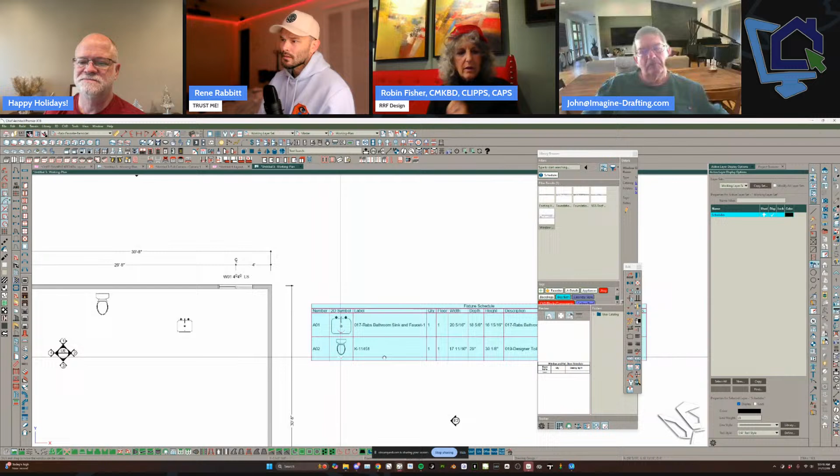This would be in the case that you have a dummy plan file to create a dummy schedule. It would be like a spec schedule. Let me just place a toilet in here, and maybe I'll place a sink fixture, and drop in some kind of fixture schedule. Then in the fixture schedule, I want to add that 2D symbol. Let me press OK, so it shows us our 2D symbol. What ideas does this give you if you wanted to do a true spec setup here and you didn't care about the plan representation?

No. Any hints? Oh, she's preoccupied. Well, actually, you know what though?

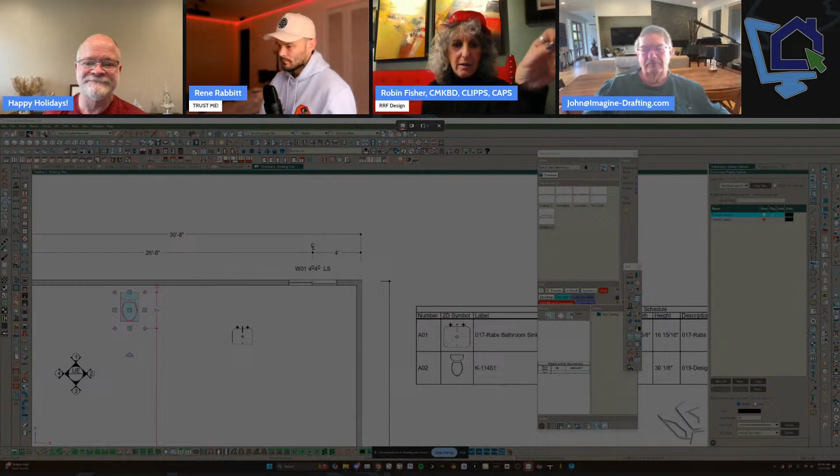Here's something that's nice about it. I don't spend a lot of time trying to find the exact model in there, because sometimes the models aren't what I need it to be. I have a toilet that I use all the time, and I created my own toilet. Toto is not in here, they do not have a Toto toilet. So I have a Toto Aquia IV, exactly the model number with the slim seat. I have one saved with the slim seat, and one saved with all the different models that I use. So it's all set up for me. Again, that same thing is set up for me.

All right, I'm gonna show you a trick. I'm gonna go ahead and edit the CAD detail of this toilet. Here's our toilet line. I can grab all this and delete it, or turn it into a blank line style if I wanted to.

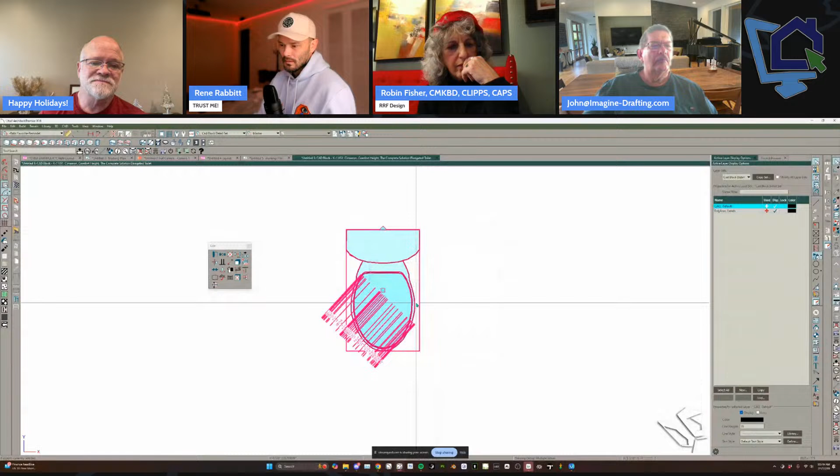By the way, if people didn't know this, I always like to mention this. You can hover over something like this, just hover over it and scroll the mouse wheel down, and it will scroll through your options. Oh, I did not know that. In case you didn't know that, yeah.

And then I'm going to just... Rene doesn't sleep, you guys, just so you know.

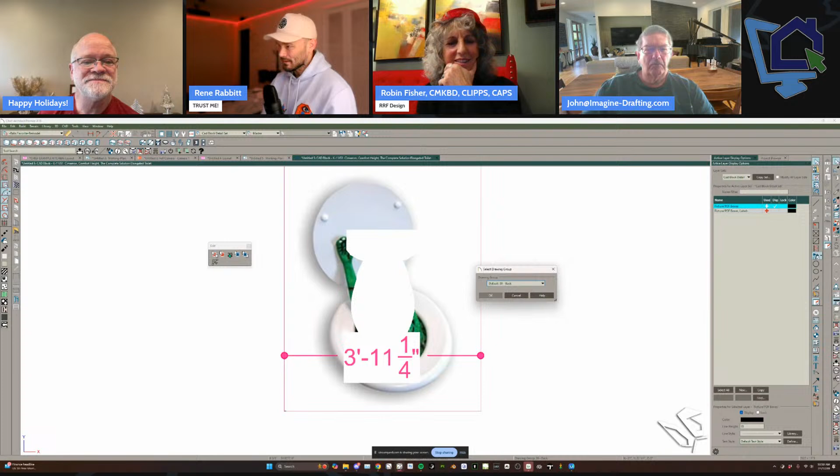He doesn't sleep. I'm just going to paste in something here that's going to represent the spec of my toilet and make sure that it's in front of our drawing sheet. Then close this down and make sure it's saved everywhere, all instances. And now take a look at my schedule.

You have a real picture. If you wanted to, you could show all your fixtures as the representative graphic fixture from the manufacturer. If you're a designer and really wanted to show this, this is a pretty common display where we're showing an actual image of our finished item. And then of course, we know that we can come in here and scale images or use plan view scale to blow this up if we wanted to make that much larger.

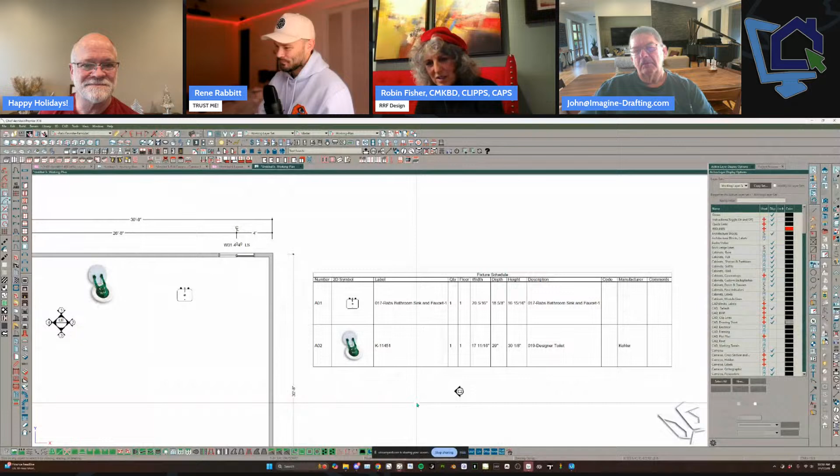I don't know if we have any coursework amongst us, and I don't even think Chief does. We don't. They have a great idea. It's a great idea. I do spend a lot of time. If you're an interior designer and you're not doing some of the crazy stuff that Rene does, you can come talk to me. If you want to do the crazy stuff, talk to him. Probably the easiest way to just say.

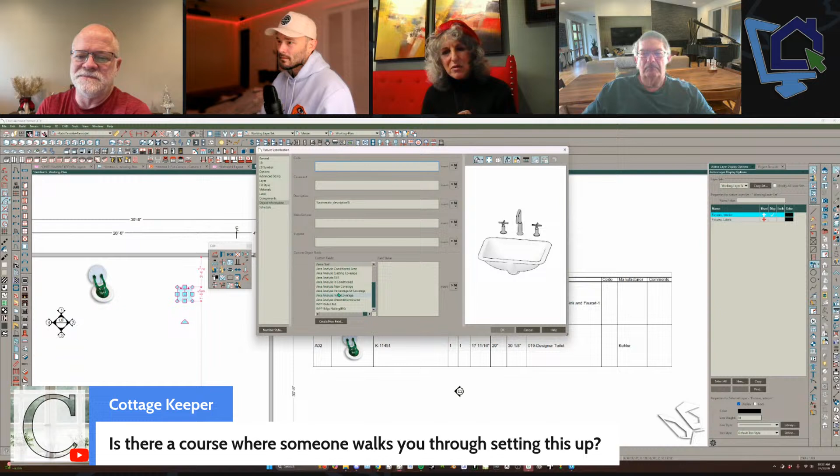That's absolutely true, let me show that real quick. But I don't do it because when I'm doing my design work, which a lot of interior designers do, you'll have the refrigerator spec open while you're designing, grabbing information and putting it into your plan. I then save it and put it in my file and send that as a separate PDF to my contractor, because they don't want to click here and open this up, they want it easy. That's the way I do it.

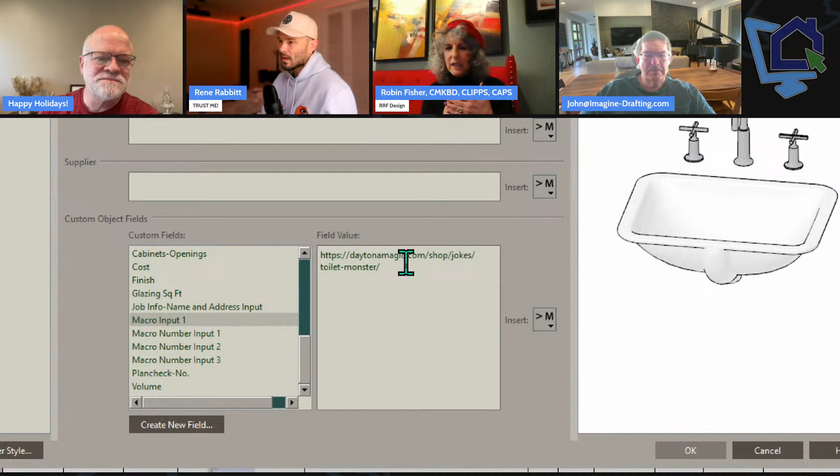All right, let me just show this real quick though. So we've got a custom field, which Robin showed us earlier. By the way, we often call the object information panel OIP, so when we're talking about OIP, that's what we mean. When putting in a custom field, I like to use a generic one so I can reuse it across different schedule types. So macro input 1 is my generic custom field, and I have a link to something here. Now this doesn't have a www prefix, which doesn't always work out well, since oftentimes you want that World Wide Web prefix. I'm going to press OK.

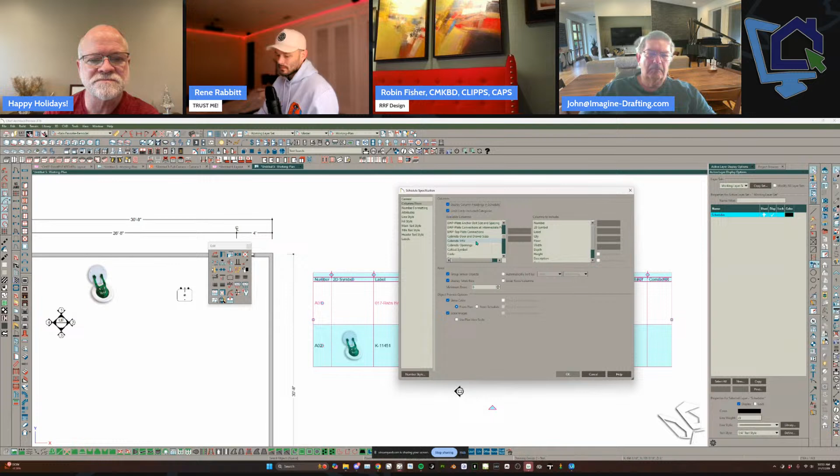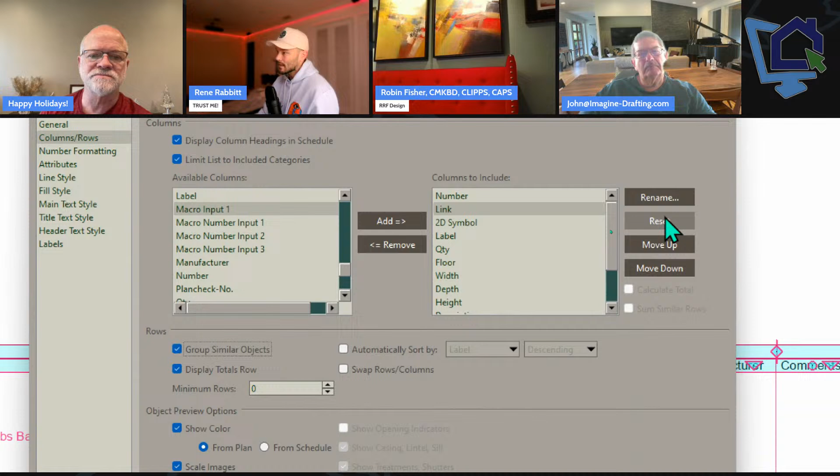Now it's not showing up in my fixture schedule because I need to add it, so I'll open up my fixture schedule and find that custom field, macro input 1, and add it. We can see it shows up in columns to include. I'll rename this to 'link.' That's why it doesn't matter what you name your custom field, so long as you know what your input is. Anytime you rename something, in case you forget where it came from, you can hit the reset button and it will reset the name. Let me press OK, and now it's going to include that link in our schedule.

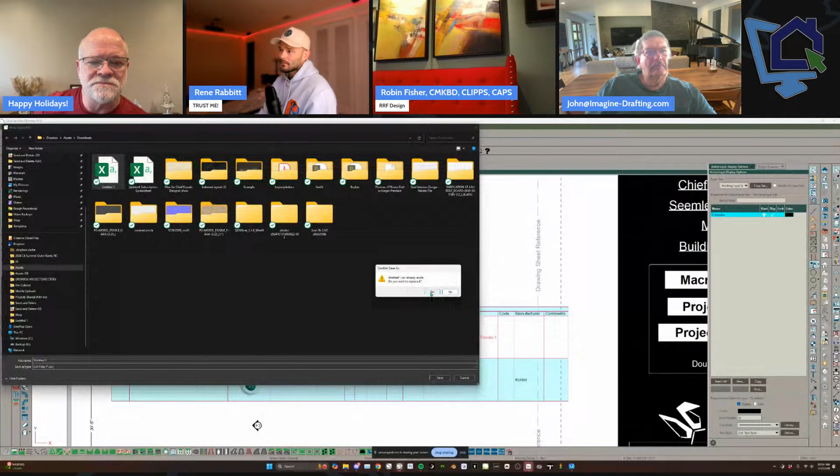A couple things we can do with schedules that are maybe a little more advanced. Sometimes you need this to report to some kind of database you're using internally with your company. We can do that, in case you didn't know. We can export this as various file types, including a CSV file. So if I export this as a CSV, I can open it in my external editor, and now it's in an Excel sheet in this case.

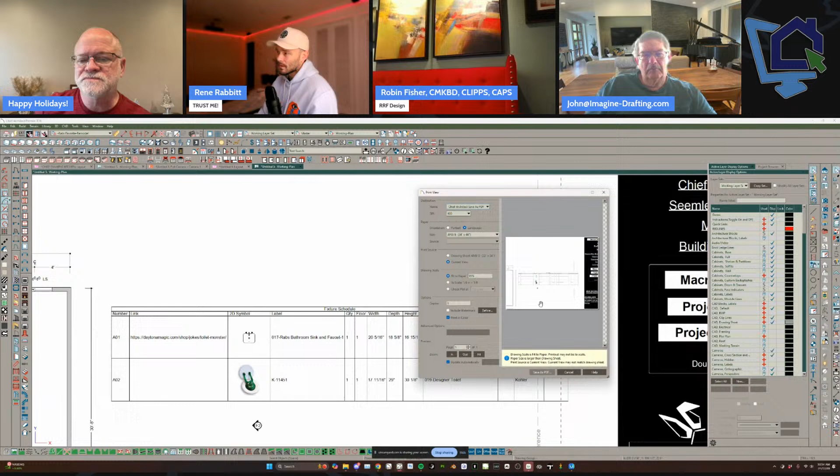Now, the next thing is I'm just going to print this, not send it to layout, it's kind of the same function. I'll print this individual page as a PDF. I'm doing this quickly just to illustrate the point, but we'll call this 'live link' so I can find it, and then it opens up in my default PDF viewer.

You can see here, as I hover over this, we're in Adobe Acrobat right now, and this is now a live link. So when I click on this, it's going to tell me it wants to go to an external site. There it goes, it's popping up that linked item. So there's my toilet monster. Bam, you can get that for $30.

We should talk about the summit a little bit because we're out of time. You've got 5 minutes, do it.

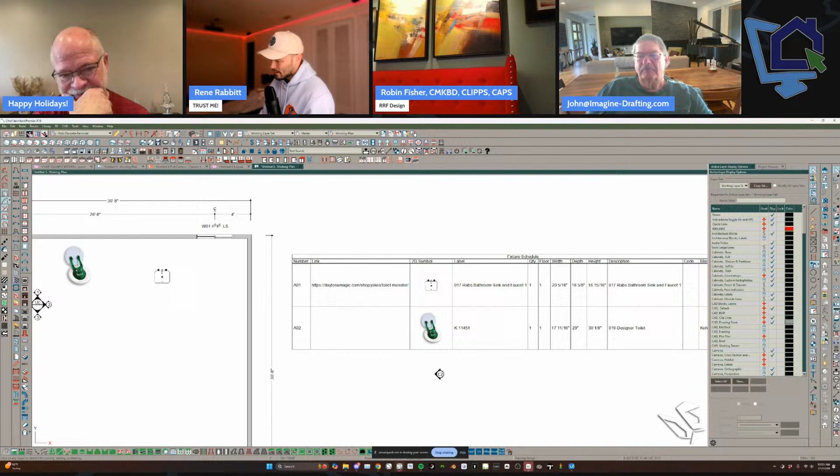Actually, before you get into that, I want to mention something that Bill Murray brought up earlier, which is a good one to note. This came up this year, we had to file what was called a Beneficial Ownership Report, which they were requiring if you had an LLC prior to 2024. Bill is saying this is unconstitutional and we don't have to do that. Great.

Check it out for yourself. Check it out. I don't know what that is.

I know you were telling us to Google BOIR, and I will, in case that was something on your list of things to do. Maybe you get to take it off your list. So far, a judge has ruled it unconstitutional. That doesn't mean it's going to hold. But we got to fact check, Bill. Yeah, fact check. Everybody fact check yourself.

We wouldn't have done our jobs if we didn't talk about the summit. So we're going to spend a couple minutes talking about the summit. I don't know if any of you have visuals up for that, but I'm getting it. At this point, you've got to know it's coming. It's not coming till the middle of March, but it's something to look forward to. For those of you on the fence, things like what we just went through are available to you at the summit.

And while we're there, our time is free. So you have the opportunity to come talk to us about pretty much anything that is of interest to you, and know that it'll be taken care of either through the sessions we hold or through one-on-one time that you carve out, or have it over a glass of wine late at night, chit chat, whatever.